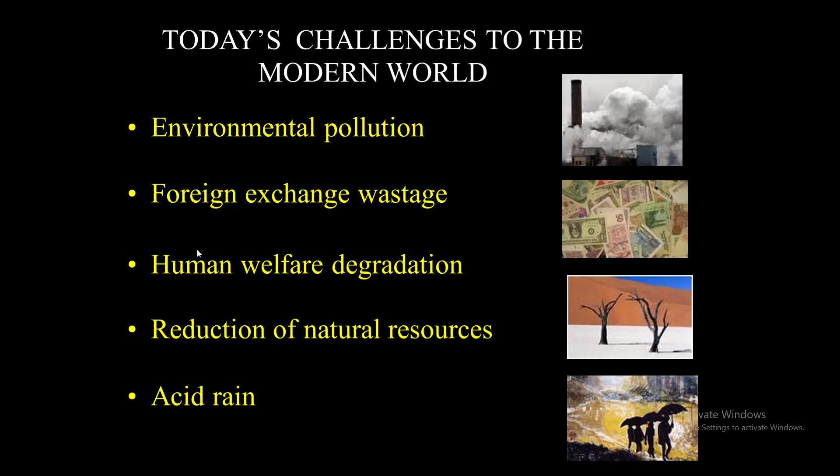Keeping this in mind, the Ministry of New and Renewable Energy is allotting more funds for research in this field. Now let us see the challenges in front of us in the modern world: environmental pollution, foreign exchange wastage, human welfare degradation, reduction of natural resources, acid rain, energy deficiency, global warming, deforestation and desertification.

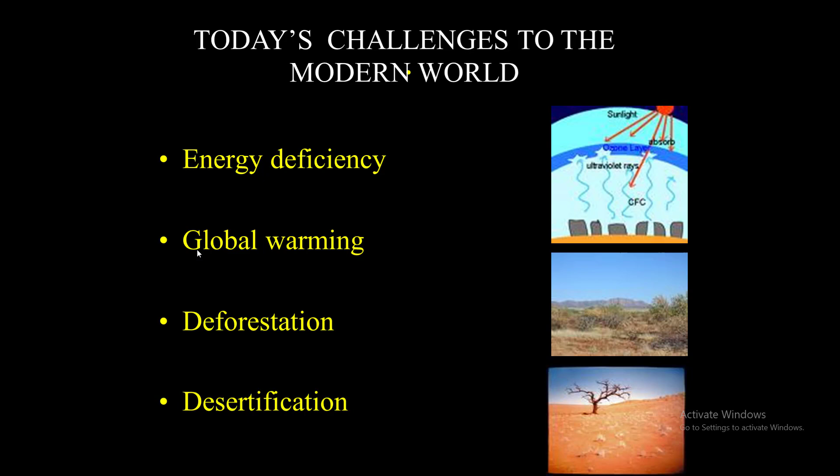One of the major challenges before us is energy deficiency. If any country wants to be in a developed position, it has to utilize more energy as much as possible. If we focus on the available energy resources, there are two sorts: conventional energy resources and new and renewable energy resources.

Usage of conventional energy resources like petrol, coal and kerosene will yield loss of money as well as environmental pollution. Extracting coal, oil and gas is dangerous and polluting, and these fossil fuels are non-renewable. As we use up easily accessible sources of coal, oil and gas, extracting them becomes harder, more expensive and more dangerous.

Burning fossil fuels for both heating and fuel for vehicles is the main source of greenhouse gases like carbon dioxide and others, which affect the atmosphere and are altering the climate.

While the Paris Agreement marked significant recognition of the efforts needed to reduce global CO2 emissions to near pre-industrial temperatures, the UN Program Report 2019 remarks that greenhouse gas emissions will need to fall drastically by 7.6% each year until 2030 to meet the targets of the agreement.

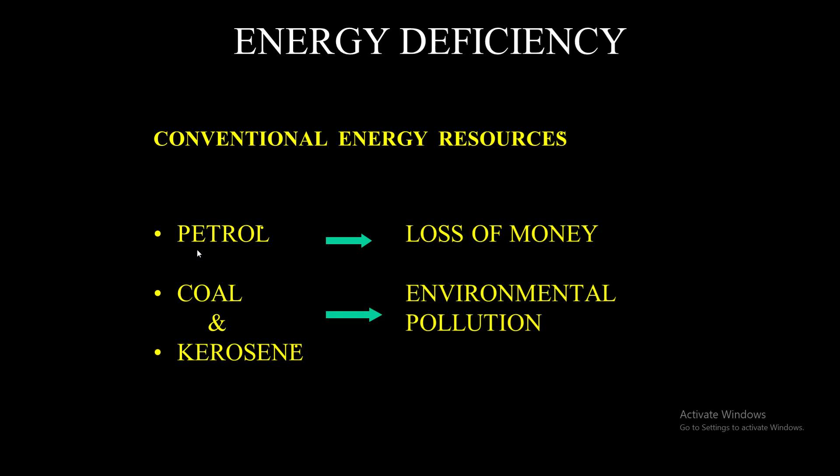Using renewable energy over fossil fuels has a number of advantages. Renewable energy technologies use resources straight from the environment to generate power. These energy sources include sunshine, wind, tides and biomass, to name some of the more popular options. Renewable resources won't run out, which cannot be said for many types of fossil fuels.

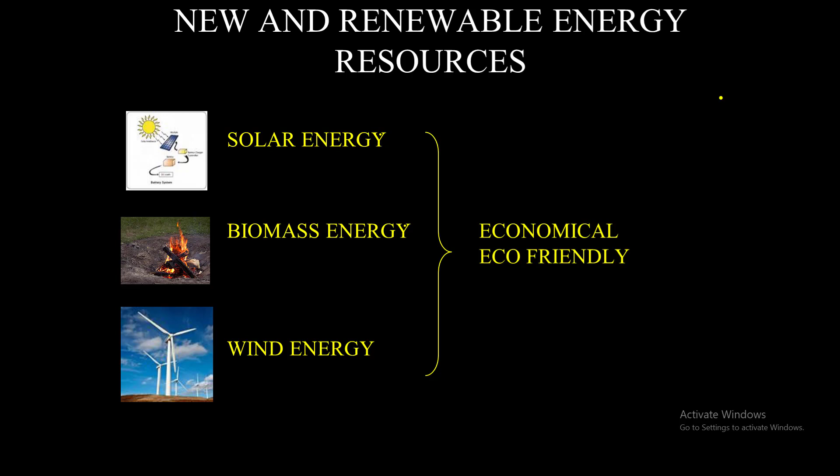As we use fossil fuel resources, they will become increasingly difficult to obtain, likely driving up both the cost and environmental impact of extraction. Renewables also lower reliance on foreign energy resources.

Among these renewable energies, I am going to concentrate on bioenergy. What is bioenergy? The energy obtained from biomass is known as bioenergy or biomass energy. Biomass is any organic matter, both living and dead, ranging from plants to organic waste. In most cases, biomass rich in oil or sugar is ideal for energy production. The term bioenergy refers to energy obtained from organisms, either living or dead. This does not include fossil fuels.

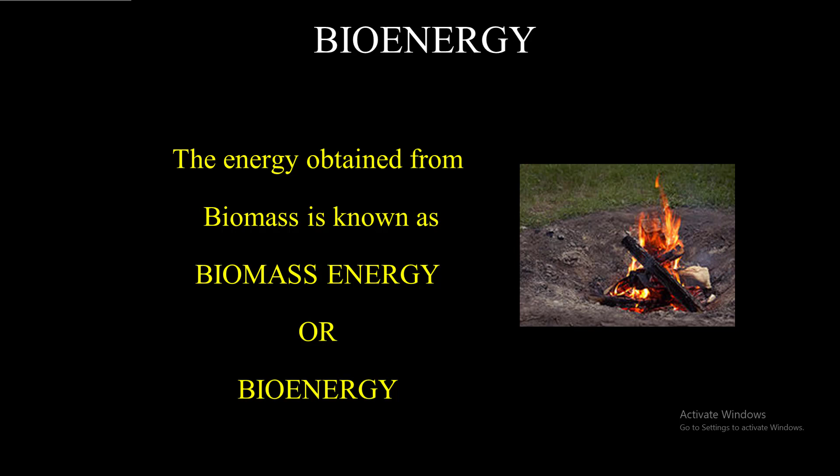Now let us see the classification of biomass residues. Biomass residues can be categorized into four types: forestry biomass, agricultural biomass, energy crops, and municipal solid waste. Forestry biomass can further be categorized into three types: primary, secondary and tertiary. Trunks of fully grown trees fall under the category of primary forestry biomass.

Branches of big trees and trunks of small trees are under the category of secondary forestry biomass. The biomass derived after processing of primary biomass is called tertiary forestry biomass.

The second category is agricultural biomass. Biomass from agricultural industries or agro-industrial residues are under this category, as well as dung of animals and poultry waste.

The third category of biomass residues is energy crops. Woody biomass producing species like bamboo, pine, switchgrass, etc., as well as starch producing species like root crops, are all under the category of energy crops.

The fourth category of biomass residues is municipal solid waste, sewage sludge, domestic cattle waste, and paper waste from offices and educational institutions. These biomass residues are available plenty in nature.

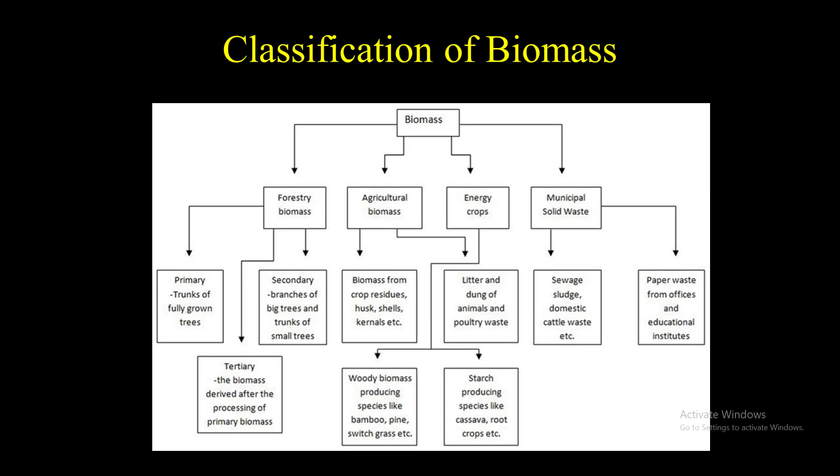Biomass contains stored energy from the sun. Plants absorb the sun's energy in a process called photosynthesis. When biomass is burnt, the chemical energy in it is released as heat. Biomass can be burned directly or converted to liquid biofuels or biogas that can be burned as fuels.

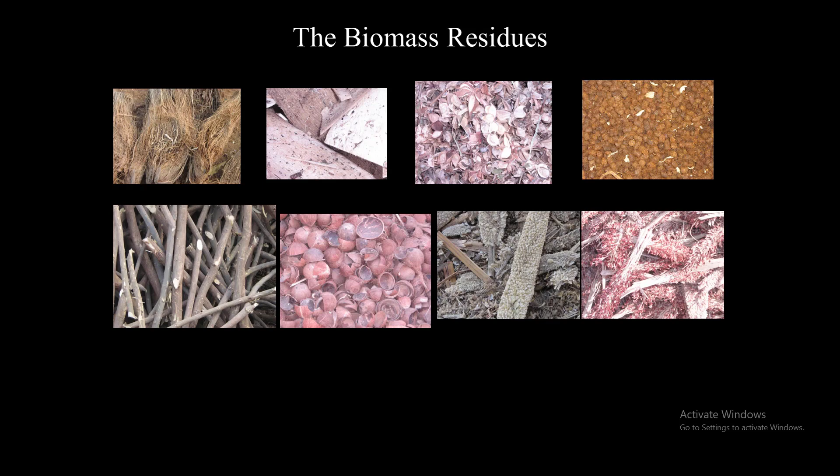These are the pictorial representations of woody biomass materials as well as agricultural and agro-industrial wastes.

Now let us see what is the technology behind converting biomass residue into bioenergy. We have to utilize proper technology to use this biomass residue in an economical as well as environmentally friendly way.

As a physicist, we know the main law behind this technology is the law of energy: energy can neither be created nor destroyed, but one sort of energy can be converted into another sort of energy. That is the main concept we are using. The available bioenergy can be converted into thermal, mechanical and then electrical energy.

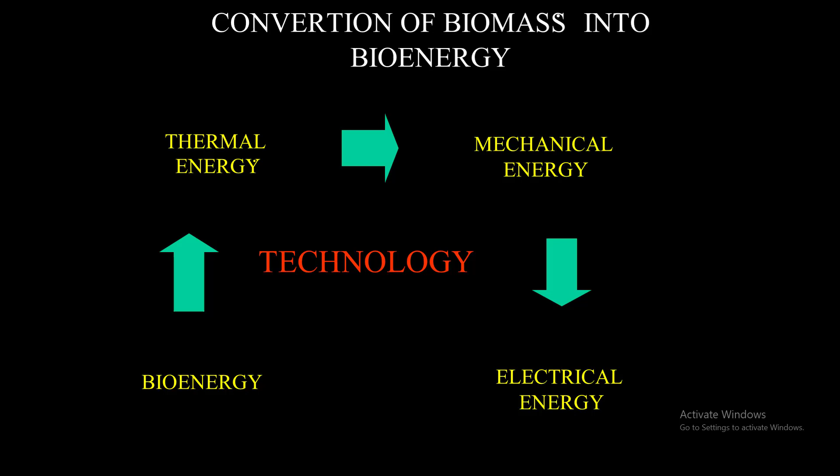The first step is to convert the biomass residues into bioenergy. The basic concept is biomass gasification, that is the conversion of solid fuels into a combustible gas mixture, or producer gas.

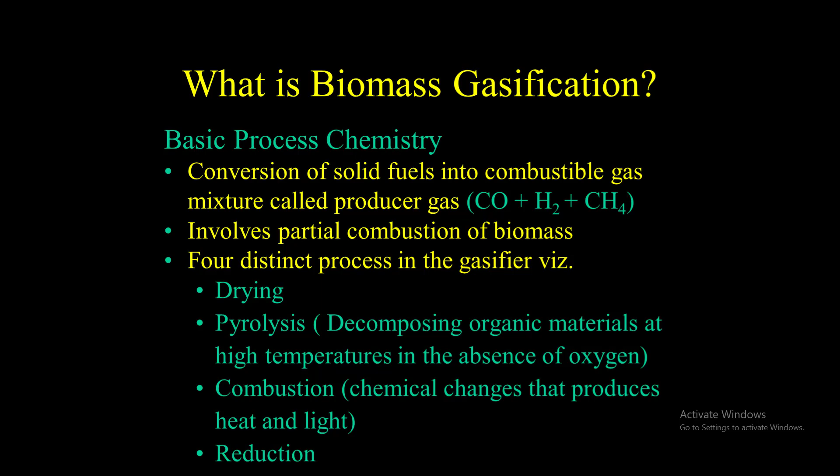For this we need a gasifier unit, which is nothing but a closed container in which we put the biomass residues, and due to direct combustion, the available biomass energy is converted into bioenergy.

This is the gasifier unit, which has 4 distinct zones. One is the drying zone, another is the pyrolysis zone, where decomposing of organic materials at high temperature in the absence of oxygen takes place. The third zone is the combustion zone, where only chemical changes occur which produce heat and light. The fourth zone is named the reduction zone.

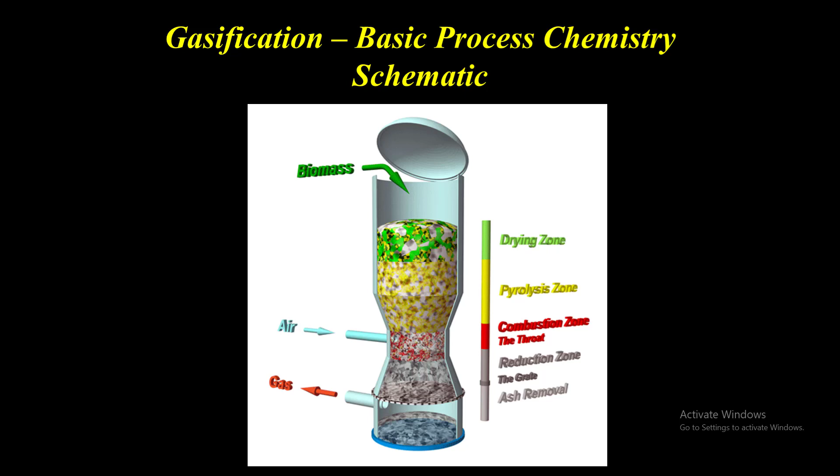What is biomass gasification? It means incomplete combustion of biomass resulting in production of combustible gases consisting of carbon monoxide, hydrogen and traces of methane. This mixture is called producer gas.

Producer gas can be used to run internal combustion engines, as a substitute for furnace oil in direct heat applications, and can be used to produce, in an economically viable way, methanol, an extremely attractive chemical feedstock for industries.

Since any biomass material can undergo gasification, this process is much more attractive than ethanol production or biogas, where only selected biomass materials can produce the fuel.

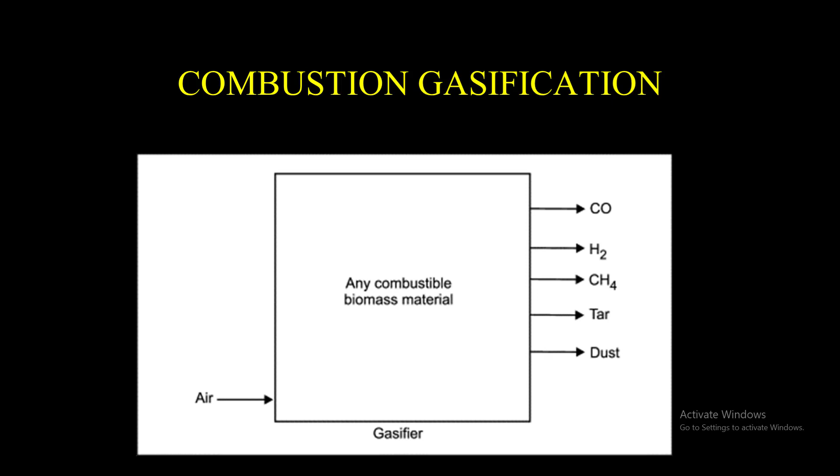Using this technology, there are several biomass based power plants generating electricity in Tamil Nadu. This photograph represents one such biomass based power plant at Eppodumvendran, Tamil Nadu. The plant generates 20 megawatts of electricity using only biomass residues, and the generated electricity is given to the Tamil Nadu Electricity Board.

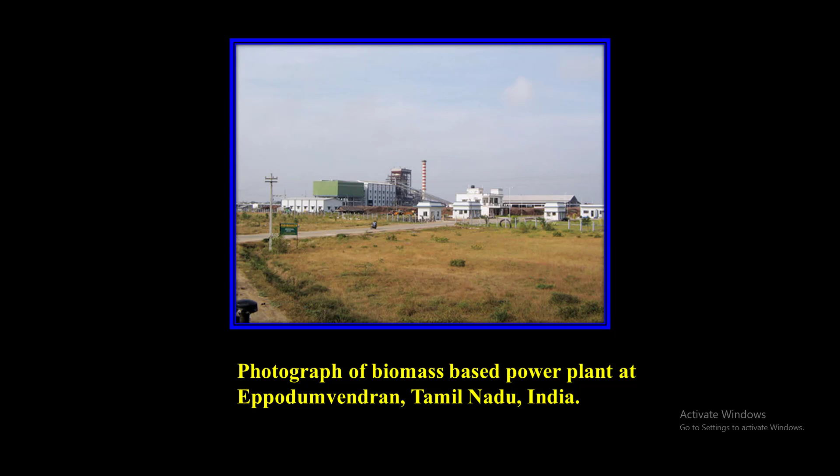Now we know the technological aspects. For the implementation or application purpose, what are the main elements needed, that is, what does a biomass based power plant need in order to convert the energy.

Number one is the boiler unit, which converts the energy available in the fuels into thermal energy, which is nothing but a gasifier unit. The second is the steam turbine unit, which converts the available thermal energy into mechanical energy. The third is an alternator unit, which converts mechanical energy into electrical power. These are the three main elements needed to convert the available bioenergy into electrical energy.

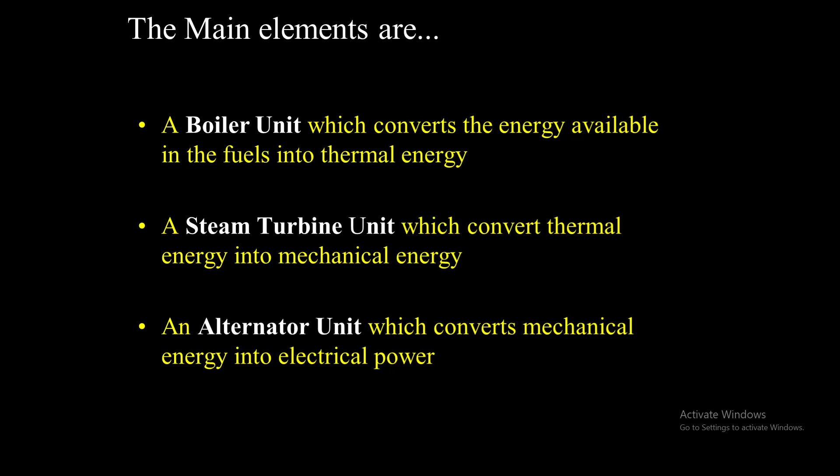Let us see one by one. The first unit is the boiler unit or gasifier unit. The boiler, named as a travelling grate combustion boiler, is where biomass residues are taken, and due to direct combustion the available energy in the solid fuel is converted into bioenergy. This combustion boiler can maintain temperature from 719 degrees Celsius to 900 degrees Celsius.

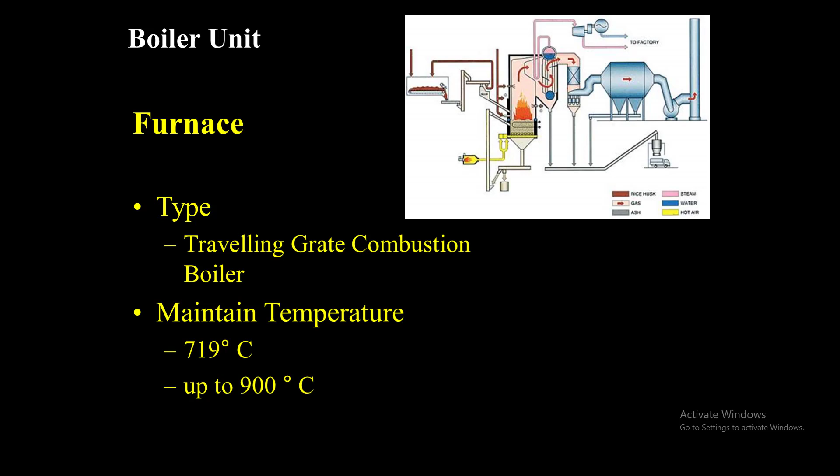The second unit is the steam turbine unit, which is placed above the boiler. So we have to place this steam turbine above the biomass gasifier. Now what is the input for the steam turbine? It is from the RO plant. Why are we using the RO plant? In order to keep the elements rust free, we are using the RO plant.

So the water from the RO plant is fed into the economizer. The economizer is some sort of heater which increases the temperature of the input water up to 300 degrees Celsius, and then the water becomes steam, and then the steam is fed into the steam drum. This steam drum is placed above the boiler so that the temperature of the steam is enhanced further, up to 500 degrees Celsius, and then it is fed into the turbine unit.

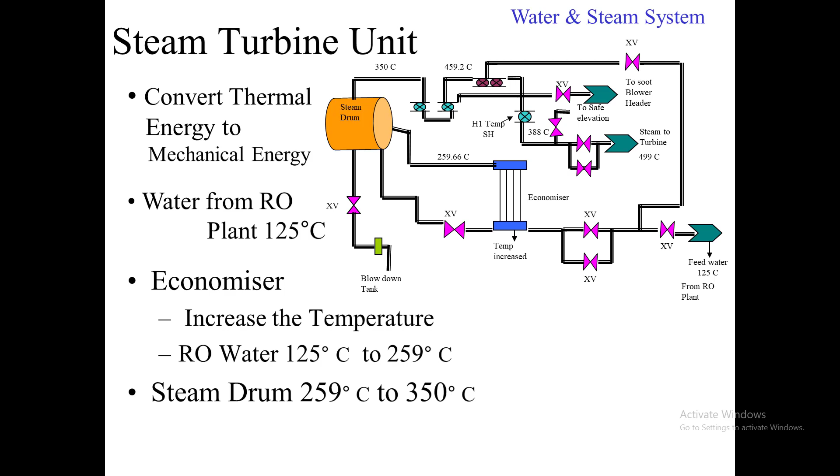Now, due to this high steam temperature, the pressure is enhanced, so that the turbine rotates. Here the thermal energy is converted into mechanical energy. This is the turbo generator unit. The inlet pressure of the turbine will be 64 kg per centimeter square. The RPM of the turbine is 2984, which is fed into an alternator unit, that is the generator. Here the mechanical energy is converted into electrical energy.

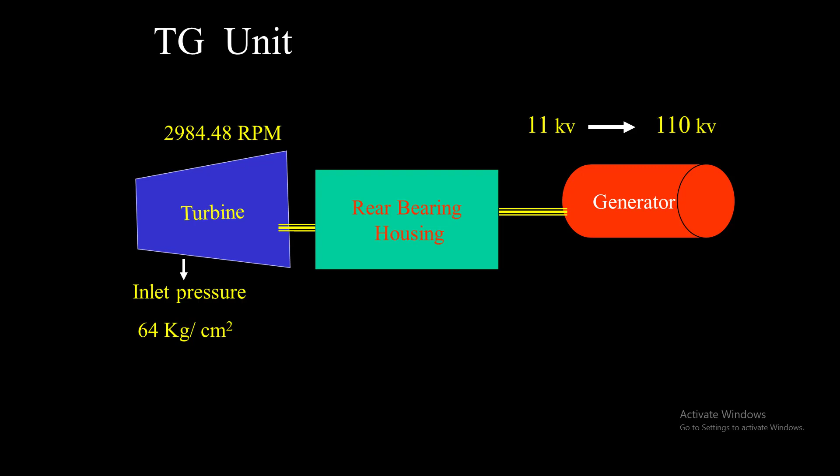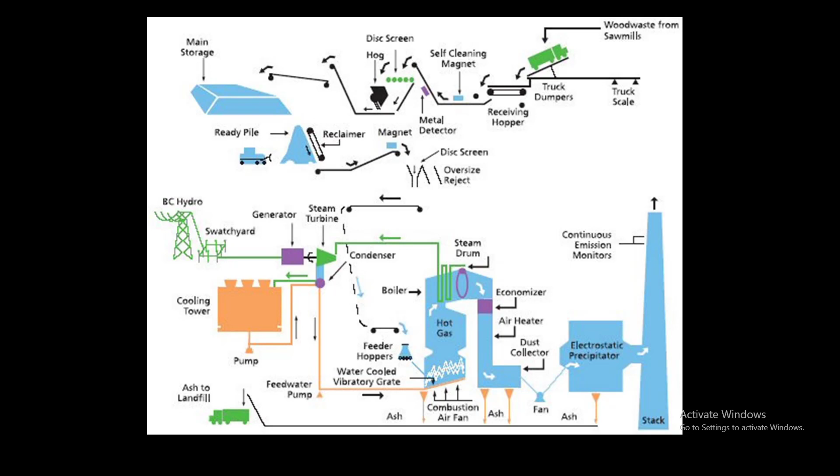Now let us focus on the economical aspects of power generation. The biomass based power plant, using 330 tons of biomass residues, generates 240 megawatts of electricity per day. That is, using 12 to 13 tons of biomass residues per hour, they generate 10 megawatts of electricity per hour. So totally, 240 megawatts of electricity is generated per day. The production cost is rupees 2.30 per unit of electricity generation, which they sell to the Tamil Nadu Electricity Board for 6 to 8 rupees. So this sort of power generation is economical as well.

So thus we have some information showing that using this technology we can generate electricity in an environmentally friendly as well as economically friendly aspect.

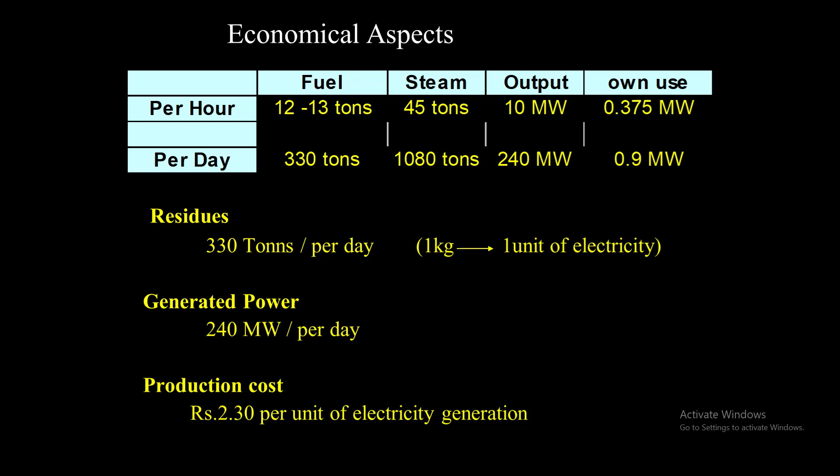Before using the biomass residues in the biomass based power plant, we have to do some sort of characterization like physicochemical properties analysis. The fundamental techniques for thermal analysis are proximate analysis, calorific value analysis, and elemental analysis.

In proximate analysis, we have to determine the moisture content, fixed carbon content, volatile matter, and ash content. Moisture content is the determinant factor which tells whether the material is ready to use in order to achieve the expected efficiency.

Calorific value is another determinant factor which gives information on the higher heating value. The calorific value purely depends upon the volatile matter, that is the chemical composition present in the biomass residues. We have to concentrate on elements like carbon, hydrogen, and oxygen. Higher proportion of carbon content and lower proportion of oxygen content will yield more efficiency, so we need to check the CHO content of the biomass residues.

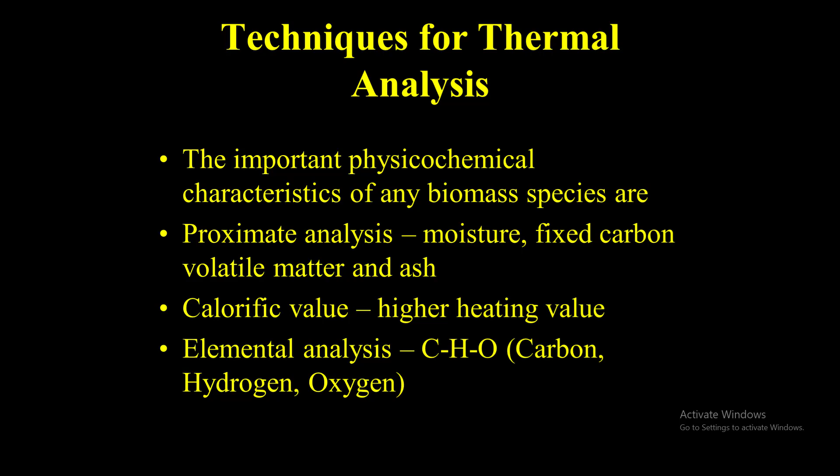This is the fundamental lab characterization we have to do before using the biomass residues. To do proximate analysis, we need a bomb calorimeter and a hot air oven.

I applied for a minor research project to UGC, and they sanctioned 2 lakhs. Using this, I purchased the equipment and did the proximate analysis using woody materials: Prosopis juliflora, Casuarina equisetifolia, and Gliricidia, which are available inside the college campus.

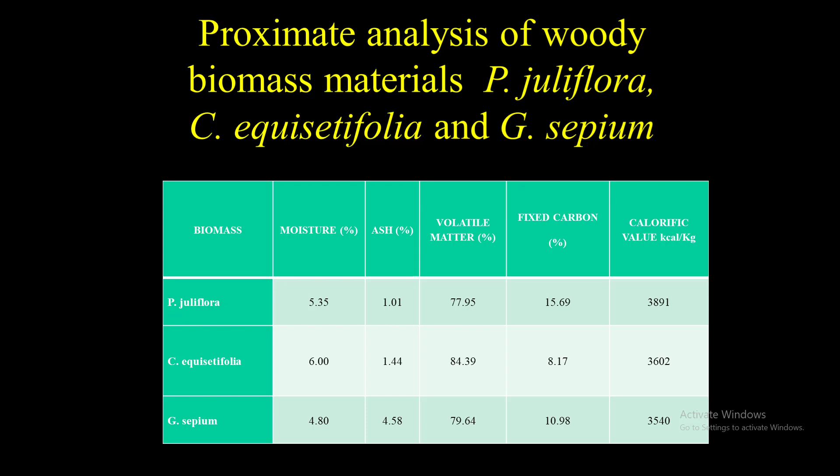Now the biomass residues are ready with the expected characteristics. Now we have to use them. For that, we created one lab, namely the biomass gasifier lab for electric power generation, sponsored by DST FIST. Using this biomass gasifier, we are generating 5 kilowatts per hour of electricity.

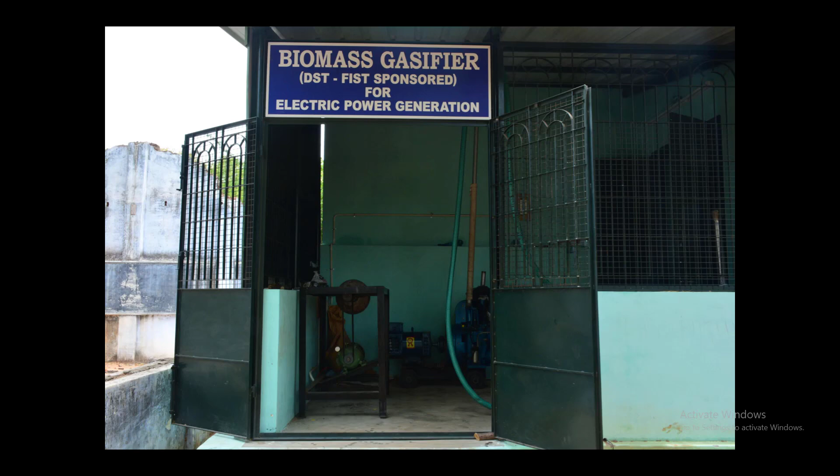For this, we are using the biomass residues available inside the campus, so we can generate 5 kilowatts per hour electricity. This is the 5 kilowatt biomass gasifier unit. This is the biomass gasifier, shown in orange color.

In the lower part, we direct combust the biomass residues. Due to direct combustion, the available solid fuel energy is converted into bioenergy, which is fed into 4 filters. Using these 4 filters, we can produce producer gas without any pollutant, and then it is given to the generator, where due to the alternator unit, mechanical energy is converted into electrical energy.

So this is the 5 kilowatt biomass gasifier unit, sponsored by DST FIST. The generated electricity is used for our lab. This is our UG lab which is running with bioenergy.

Our contribution to society is utilizing the biomass residues available in our campus. We are generating electricity of 5 kilowatts per hour, and the generated electricity is utilized in our lab. We also invite our neighborhood colleges and ask them to visit our lab, thus creating awareness of renewable energy resources.